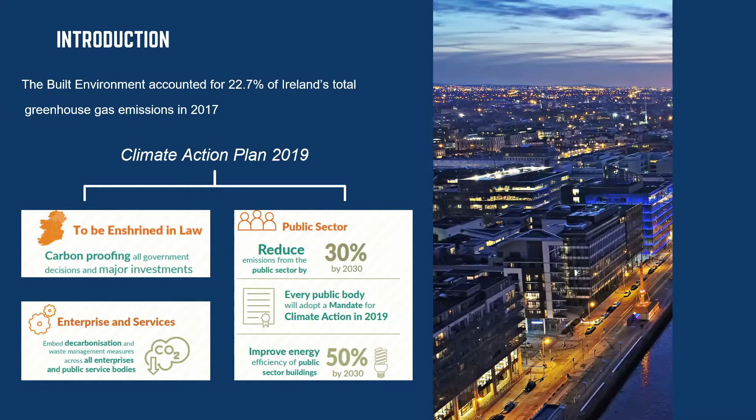It's helping since our latest election in February, which was finally resolved in about late March or April. We do have the Green Party as a coalition partner. So that is certainly helping, knocking and getting open doors within government within Ireland.

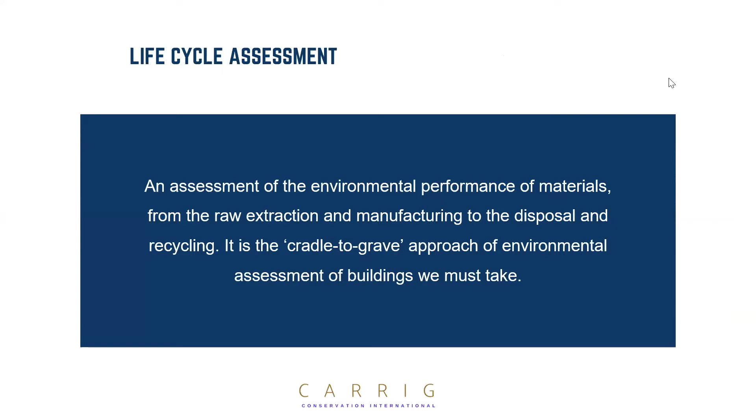So life cycle assessment really is an assessment of the environmental performance of materials from the raw extraction and manufacturing to the disposal and recycling. It is the cradle to grave approach of environmental assessment of buildings that we must take. So when you look at construction, the raw material extraction, processing, manufacture, transport, and then the construction, what we haven't included in there is waste of construction materials, which does happen on a reasonably large scale. But the transport alone, if you look at the history in recent times of our stone industry in Europe, whereas stone, granite now mostly comes from China, and there's huge carbon transport involved in that transport.

And then operational emissions, heating, cooling, ventilation, power, lighting. Maintenance, which is often ignored but not looked at seriously. And then retrofit. And I know Tom is talking after this about the suitability of materials, but if we use the wrong materials in a retrofit, we're not only doing damage to the building, but we're doing damage to the environment as well. So we really do need to look at that. And then the end of life demolition. As I pointed in the first couple of slides, transport, and then recycling and landfill.

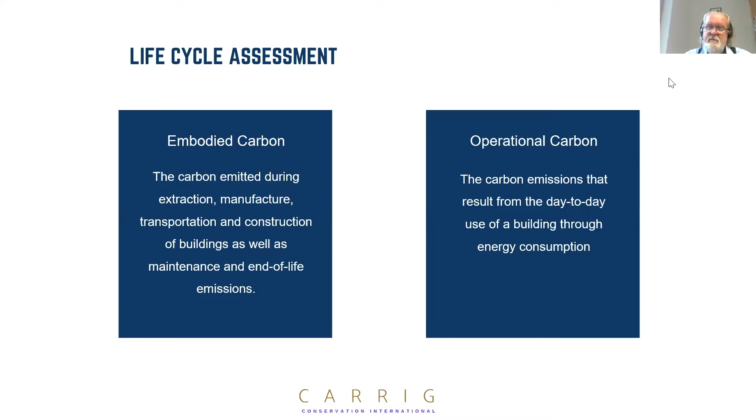And the reference study period, and this we argued and discussed and debated at length. But to be realistic, we agreed at the end that the reference study period for any of our studies would be 60 years. In the US, they've taken 75 years. But when you think 60 years is literally 1960, we have an awful lot of buildings that are a lot older than 1960. So perhaps this should be also looked at.

And then life cycle assessment on refurbishment versus new build. Time zero with refurbished cases starts at the time of retrofit, not at the time of initial construction. Only current and future carbon emissions are accounted for, not the carbon which has already been emitted. And in some cases, buildings older than 60 years perhaps should get carbon credits, for instance. New build, time zero with new build begins with the demolition of an existing building, but doesn't take in the carbon footprint of that demolition, and then includes everything after that.

EPDs, or environmental product declarations, were, I think, the first EN, well, you can see it at the bottom of the page, came in 2012, a direction from the EU with a European standard, which was actually more of a guideline than a standard, that all manufacturing companies should produce EPDs, or environmental product declarations.

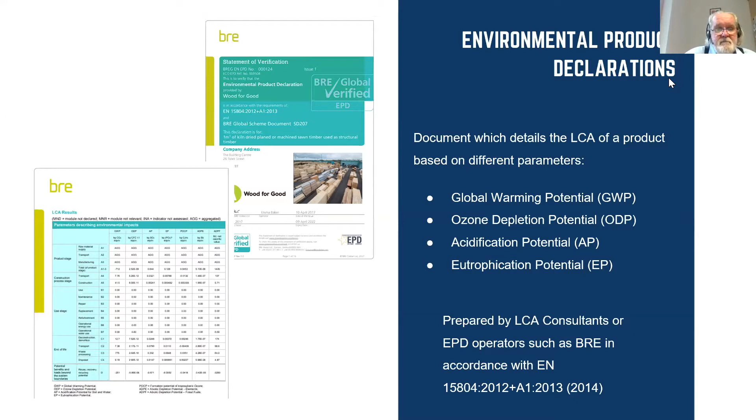And I believe France is the first European country to actually introduce legislation that from April of next year, I believe, all companies manufacturing in France will have to produce EPDs. Which will be really helpful for assessing, and for us from a professional point of view, to get the right information so that we can make the right decisions.

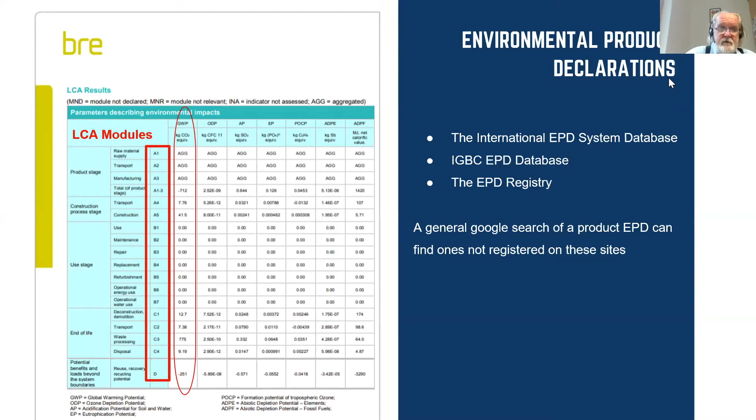The global warming potential is one of the key factors, and this is really what we should be looking at. And then the classification or the LCA modules are the important information that we need to then move forward into designing low carbon solutions for either retrofitting or indeed for new build. Pardon me.

Databases we found are lacking information, although the Inventory of Carbon and Energy is an extremely good one, and it's been kept up to date, which is fantastic, and it is a great resource. The BRE Green Guide is good, and then the WRAP Embodied Carbon database is getting there as well. The ICE, which isn't the Institute of Civil Engineers, but the Inventory of Carbon, is easily accessible, provides environmental impact in CO2 equivalents for many commonly used materials, and only 3 LCA modules, and this is where we really need to change. And these are just some examples.

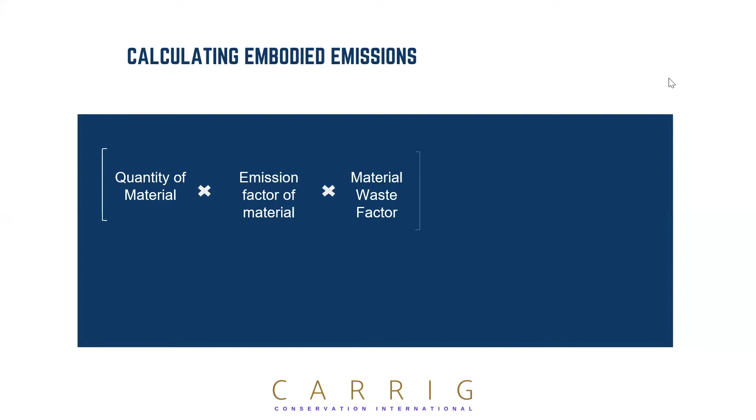They're hard to read there on the slide, but you'll be getting a copy of this for more study later, if you like. But calculating embodied emissions is a process: quantity of material, emission factor of material, material waste factor, and then number of replacements within the reference study period.

And this is where a lot of people, and I mentioned maintenance is often ignored or not taken into consideration. But if you replace, let's say, sash timber windows with UPVC windows, they're very, very efficient in the first 5 years, pretty efficient in the second 5 years. And then they start degrading and they need to be replaced usually in around 25 years. So you must also take that into consideration, and that will give you the correct embodied emission of materials. And then the sum of all materials' embodied emissions equals the building embodied emissions over the study period.

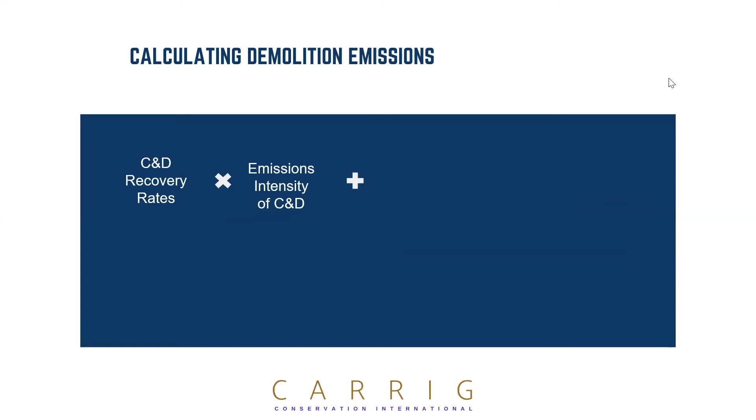Calculating demolition emissions, as I say, is difficult because there isn't a very good database for this, or it's not recorded. A lot of people just demolish and dump locally and don't record where it actually goes. Emissions intensity of construction demolition waste, landfill recovery rates, emissions intensity of landfill equals demolition emissions. And again, we need to really get some good handles on this information.

And then calculating operational emissions: CO2 equivalent emissions intensity of fuel. And we know most governments are actually driving to produce a lot of our energy by renewables. But we're still a way off on that. But even with renewables, there is an emission or a carbon cost. I mean, the big wind turbines have to be manufactured, solar panels have to be manufactured. So the end product might be low carbon, but we have to look at the whole life cycle. And then the quantity of fuel used equals operational emissions.

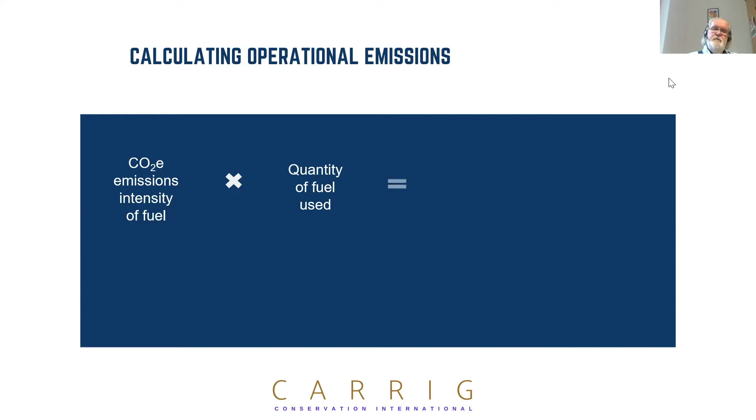Most of you know all this, but what I'm getting to is that in the studies that we have done, we have not found an LCA tool, a life cycle analysis tool, that is absolutely suited to existing traditional or heritage buildings.

Most of them are designed for new construction, and they're fine for that, but it's very, very difficult to get the right information to put into an LCA, and I'll cover that towards the back end.

So Villa Dammen is a 1936 timber frame house, typical of the Norwegian ordinary house typology. Energy retrofitted in 2014. The interventions included weatherproofing windows and doors, insulating the pipes and domestic water heater, and installation of a wood burning stove. The occupants also altered their heating management by using temperature zones during heating season and reducing the set point temperature when the house was unoccupied.

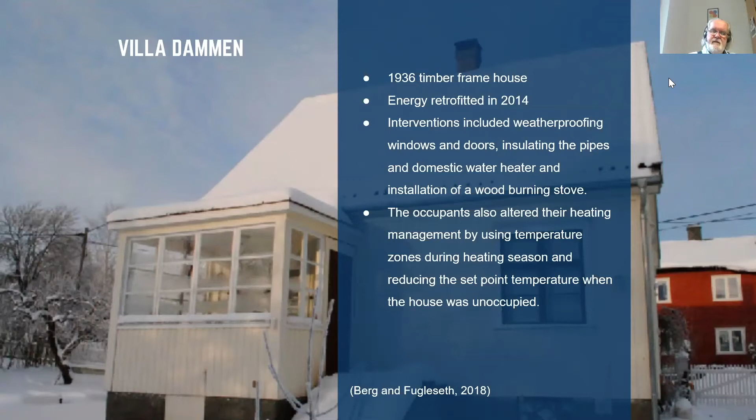And one of my colleagues said, buildings don't use energy, people do. And I think we have a lot of education to do with people on how to run our buildings, particularly our existing ones. We look at the base case, a refurbishment, then demolition and new build. And in most cases, refurbishment saves, in this case, 295 tons of CO2 compared to base case. And new build emissions are only 8% lower within 60 years compared to refurbishment.

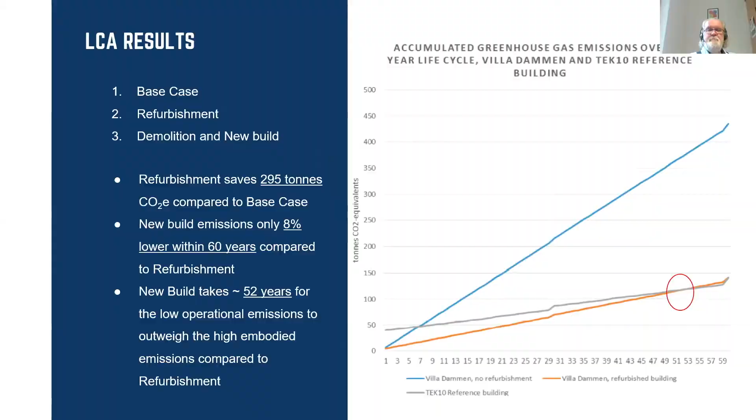New build takes 52 years for the low operational emissions to outweigh the high embodied emissions compared to refurbishment. And this is a graph that shows this. I think my photograph's in the way there, but you can see the circle there where it takes 52 years to pay back. The type and quantity of materials used, and again, Tom is going to cover this in the next one, is a really, really important part of all this. And by sourcing local materials, life cycle emissions can be reduced. In the 1800s, early 1900s, we used local materials.

Data on materials used in refurbishment of historic buildings should be strengthened. We must understand all the side effects that the wrong materials can have on building materials and building fabric. And then we need to educate city planning authorities, because in recent times we've specified products that the planners come back and say, well, we don't know this product and we don't want it used on this building. Which is pretty bizarre, but we do need to start an education process. Occupier behavior, as I said, is also very important.

In the USA, there was a case study done, which we peer reviewed and had a look at, and it was a large scale study, 6 different typologies across 4 different climates in the US. Building reuse versus new construction: renovated, best renovated, new build, best new build. They chose a period of 75 years as their study period. And then 4 indicators: climate change, human health, ecosystem quality, and resource depletion. It's referenced in the final slides, so people can download it later. So building reuse almost always yields fewer environmental impacts than new construction when comparing buildings of similar size and functionality.

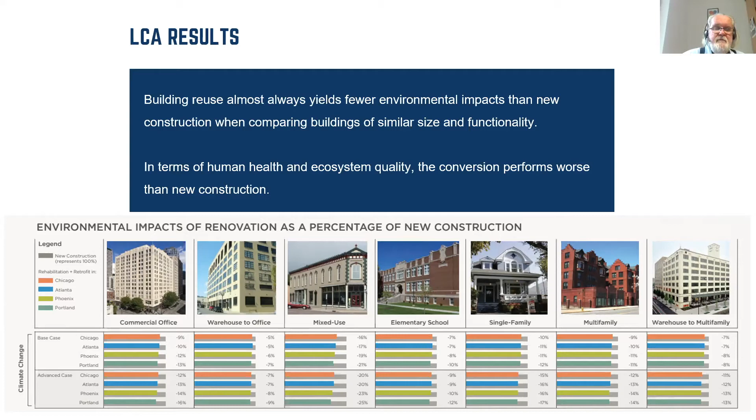And this is the US study on impacts of renovation. They took commercial office, warehouse to office, mixed use, elementary school, single family use, multifamily use, and a warehouse to multifamily use. And the findings are quite encouraging, and I encourage you to have a look at that later on. But it effectively concludes that reuse matters, improved life cycle inventory data, a better understanding of material impacts, quantity and type of materials used matter, and balance between carbon and other indicators is required.

And in most of our EPCs or BERs, building energy ratings, in other parts of Europe, we don't look at carbon at all. And in fact, in a lot of cases for traditional and heritage buildings, they have a default for solid wall construction. This has to be changed. It really does, because all the research in Scotland, in England, in Wales, here in Ireland, where we've physically measured U values of traditional or heritage buildings, they always perform much better than the default that has been set by these tick box situations. That's another whole hour's talk that you could get me going on, but let's not do it now.

Our case study in England featured five buildings in the end, but the ones that we concentrated on were a Victorian terrace refurbishment. Case study 2 was a chapel conversion from a small chapel to a private residence, and then compared to a standard new build meeting 2019 building regulations. And then the carbon emissions and costings were compared between each case study and the new build. And again, this study is on the Historic England website and can be downloaded and looked at.

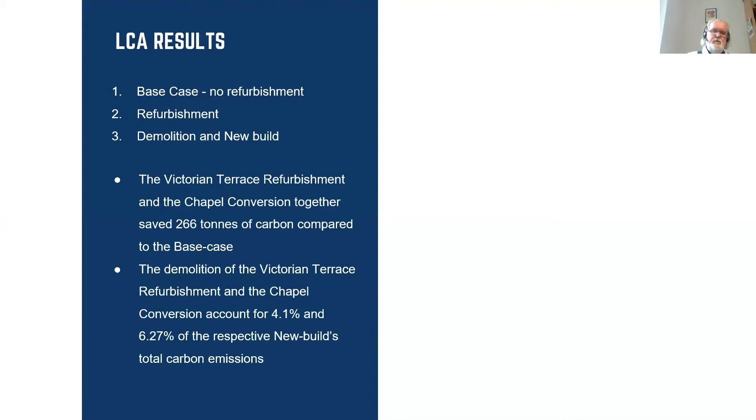But in very brief, the base case, no refurbishment, doing a refurbishment, and then doing a demolition and new build. The Victorian terrace refurbishment and the chapel conversion together saved about 260 tonnes of carbon compared to the base case. The demolition of the Victorian terrace refurbishment and chapel conversion account for 4.1% and 6.2% of the respective new builds' total carbon emissions. So it's quite stark.

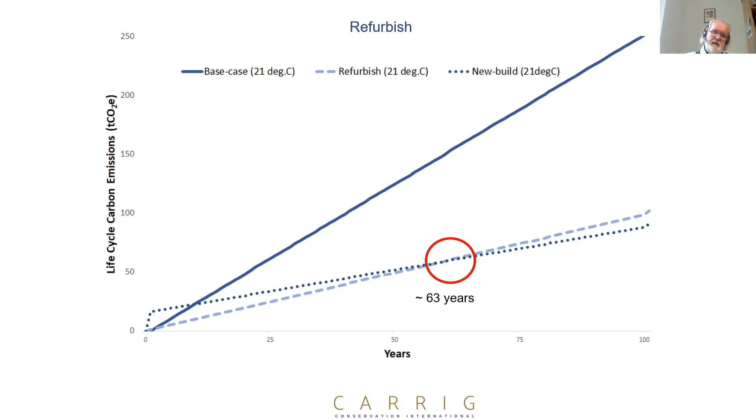So again, a chart, and you can see the dark dotted line is the new build, and it's very carbon intensive when you build it, and then it slowly works out. But again, if you take a new build against a good retrofit, it's going to take you 63 years to pay back the carbon of that new building. So we believe these are strong arguments and facts that we can now start using to gain traction, if you like, for policy change.

In the case of the conversion, again, the new build, it's about 13 years of a difference. But again, as more products are made more environmentally, that will change also. And this is perhaps using high carbon insulation, for instance, rather than a wood fiber board. But these projects were actually done before we had any influence in changing their mind. What we'd love to do as a follow-on study is to take maybe 10 buildings and actually specify what should be done, and then implement and then monitor, and to get real hard data.

So the conclusions really are: deep energy efficient refurbishment of historic buildings is necessary. When I was involved through ICOMOS in writing the EN European standard on deep retrofit of historic buildings, EN 16883, I think it is, we found that on average about 34% of our built environment is pre-1945. And that is a massive share of our built heritage.

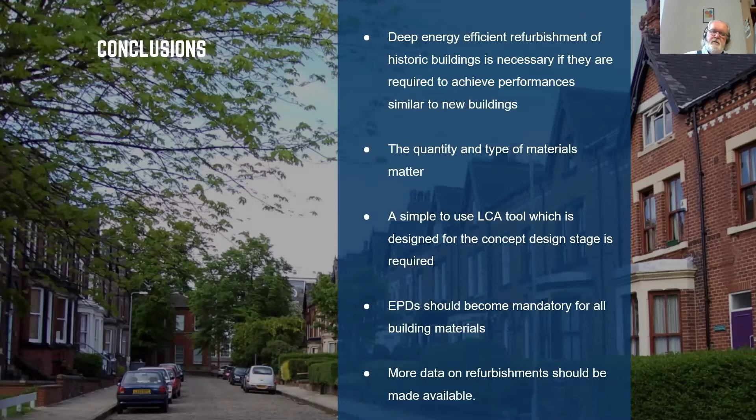So what are the next steps? As I say, an LCA tool, and we are working on that. We've got some funding from the Irish government to develop a prototype, and we have some external European investors as well. So we're hoping that we might be able to move that forward, and we'll certainly let STBA and SPAB know if it comes to fruition. But it's essential at concept design stage. It's too late coming to us or any of the professionals with a designed building, because then it's very, very difficult to make changes. So carbon really should be studied at the very first.

So if we can get all these, building material manufacturers must have EPDs. We're really lobbying the Irish government at the moment to try and make that mandatory next year. And then we've got to also think about the circular economy, and can we design for reuse? And I think we can if we put some thought into it, but we also need to perhaps start the education process early on in architectural schools and engineering schools.

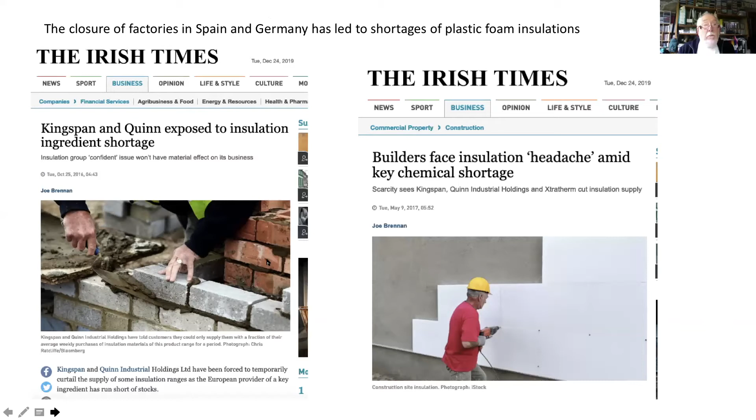And what people are using in buildings today are high embodied energy, hazardous petrochemical materials that damage health and the planet. But unfortunately, what I call the energy efficiency zealots continue to promote these materials because they say it's the only available technology. And the implication is that other alternatives are not readily available. So here we go. Here's some of the examples of what people are doing, particularly to try and retrofit buildings using these plastic foam materials.

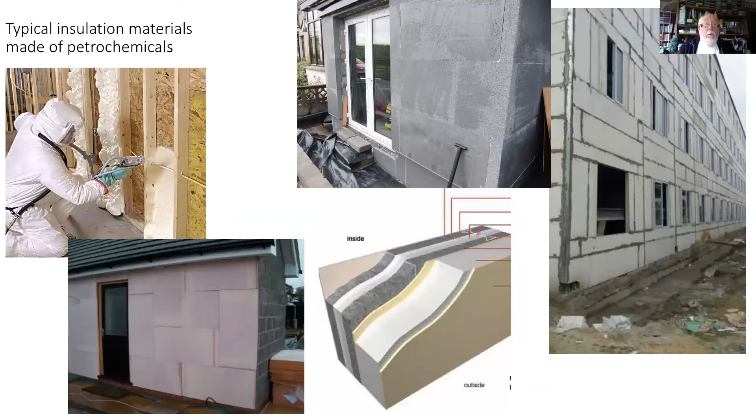So because of this clampdown on toxic pollution in Europe, particularly in the manufacture of isocyanates, the manufacture then moved to China, mainly to Asia as well, other parts of Asia, India and so on. And what that led to directly was a massive increase in CFC emissions. So when people talk about embodied energy, they are talking about CO2, but they forget about things like CFC emissions.

But the other big problem that we face, and I realize Peter's already touched on this to some extent, is the fact that we don't have good data on embodied energy. He mentioned the ICE database, which is great that it's there, but it is weak. And particularly if you try and look for data on the embodied energy of insulation materials, you'll find it very difficult to get good information. And there's a couple of pieces of work done by Callum Hill and others here, which do give you some information, but it is a problem because we don't have enough data on this.

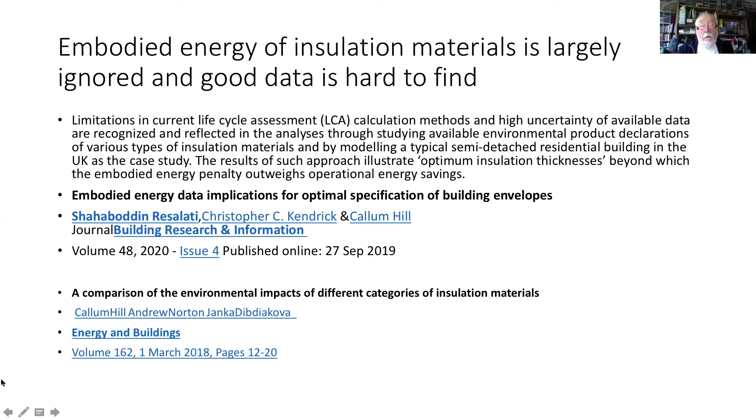And again, this is a repetition of what Peter was talking about, what Jukka Heinonen in Finland called the carbon spike, in which he showed how the emissions are due to the energy which is being consumed at the manufacturing and construction stage, not during the life of the building. That is the real problem that we've got. It's not trying to make buildings more energy efficient for the future, which I guess is something we should do, but the important thing is to reduce this carbon spike problem.

Another good person who's done a lot of work on this is Simon Sturgis, and he made a very interesting critique of the Green Construction Board route map, because it fails to take account of whole life emissions and the need to adopt a holistic approach. He gives some data on this, well worth reading.

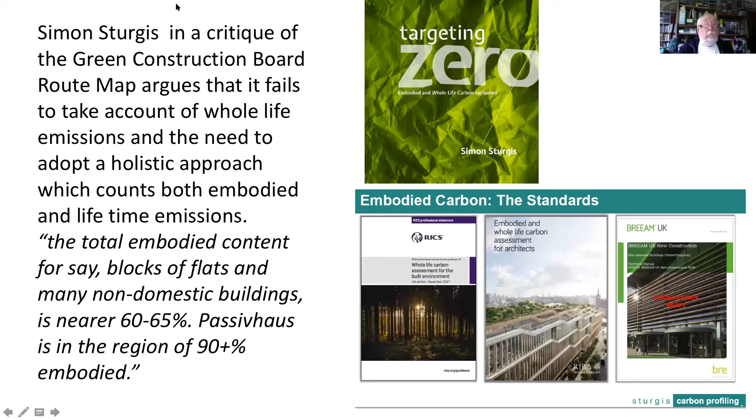And then the other thing which Peter mentioned is that if we use the wrong materials in buildings, particularly in retrofit, then we end up with these kind of problems. So we've got problems with cavity wall insulation, internal wall insulation, and external wall insulation. And one of the reasons we're having these problems is that the organizations that are calling for retrofit and zero carbon and Green New Deal and so on largely ignore the issue of insulation.

And I've been doing a study. I'm now up to about 60 reports on zero carbon and retrofit. And every single one I look at says nothing about insulation. So here we've got a range of documents that have been produced to argue for the importance of these sorts of things. And insulation is never mentioned other than very occasionally, and then usually in the most general of ways. So we need to insulate buildings, that's what they say, but none of them go into any detail. That's what's shocking about it.

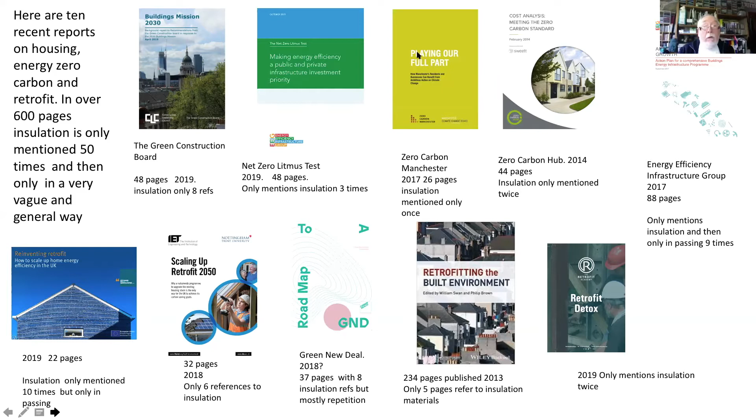Here's a whole stack more of them. It really is quite baffling that people can write reports about how we need to renovate and retrofit buildings and not even mention insulation. That has to say something about the fact that people don't understand the issues. Perhaps the worst of all is the UK GBC document, Net Zero Carbon Buildings, which doesn't mention insulation once.

Interestingly, the House of Commons energy efficiency building towards net zero and the much maligned Each Home Counts report do actually go into insulation in quite a lot of detail. So that's good. It's good that somebody's actually addressed these issues.

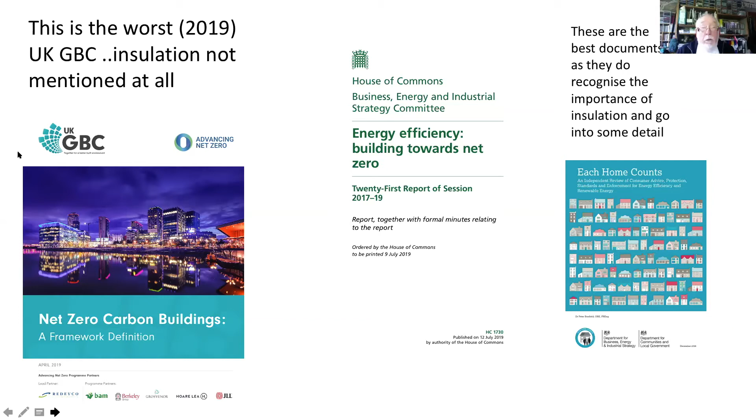But the problem we're facing in the UK, I'm not so sure about Ireland, is what's becoming known as the retrofit disaster problem. And here's a couple of interesting quotations. There's someone working at Bridgend Council delivering Arbed schemes. He says, we were merrily cladding buildings, filling cavities full of insulation. 5 years later, we've got companies setting up now to take the cladding off, take the insulation out, because we realized that actually either wasn't the right thing to do, or the skill set that delivered it wasn't properly skilled or done in a rush.

And this is becoming a massive problem, which is beginning to get into the media. There was a report about this in the Sunday Times quite recently, though it focused really on cavity wall insulation problems. And obviously there's been a response to this. We're now expected to comply with PAS 2035. I'm not sure that PAS 2035 will solve the problem, because it doesn't deal with the issue of materials, and it certainly doesn't deal with the issue of embodied energy.

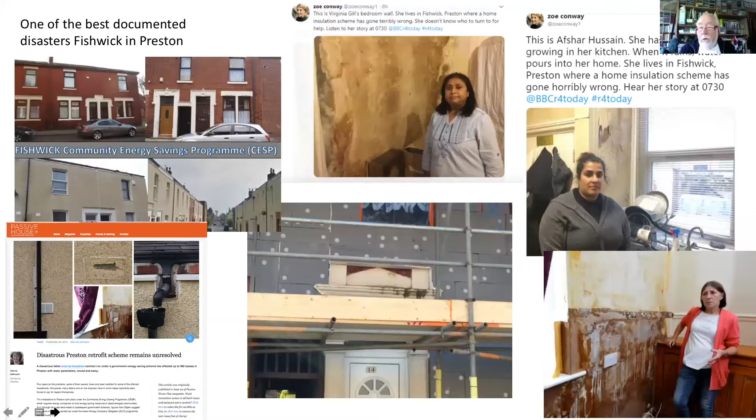So here's just a few other horror pictures from the retrofit disaster problem. I won't spend a lot of time on this because some of you will probably be familiar with this. Perhaps people are particularly familiar with Fishwick in Preston, and the NEA did a webinar about this the other day, because they're trying to deal with some of the problems here. But I've got a lot more stuff on this if people are interested in it and not familiar with it.

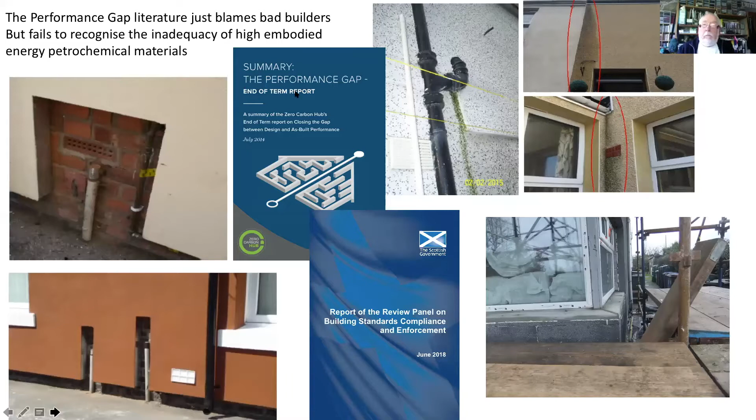The other problem with the wrong kind of materials is using flammable materials. So one of the problems with petrochemical insulations is that most of them burn. Some of them burn more easily than others. And of course, people are familiar with the horrific story of Grenfell, but what tends to get ignored is the serious problems in lower-rise buildings, in which there are literally dozens and dozens of fires, all of which, in my view, are a result of using flammable petrochemical foam insulation materials in buildings. There's also a problem with poor installation of fire stopping and so on.

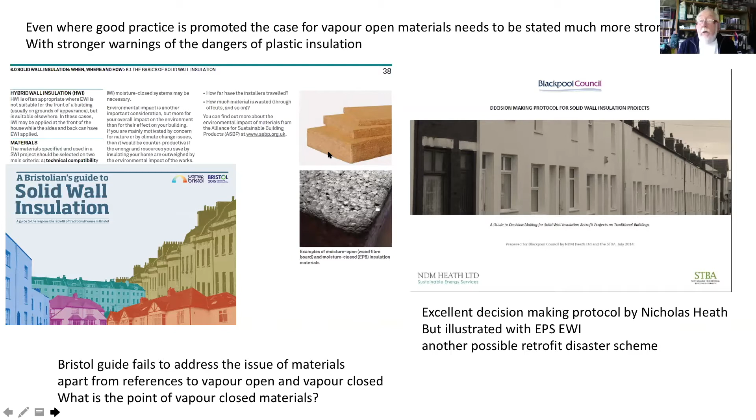So I believe it's important to be much more explicit about the need to use the right kinds of materials, and we have to be using vapor open materials, and these materials by and large have much lower embodied energy than the petrochemical materials that I've been criticizing.

So here we've got some examples of wood fiber insulation, which is being increasingly used, though one of the problems with wood fiber insulation is it's being imported from Europe. It's not manufactured here in the UK. In fact, hundreds of thousands of tons of wood waste go to landfill in the UK every year, which could easily be used to make wood fiber insulation, but that doesn't happen.

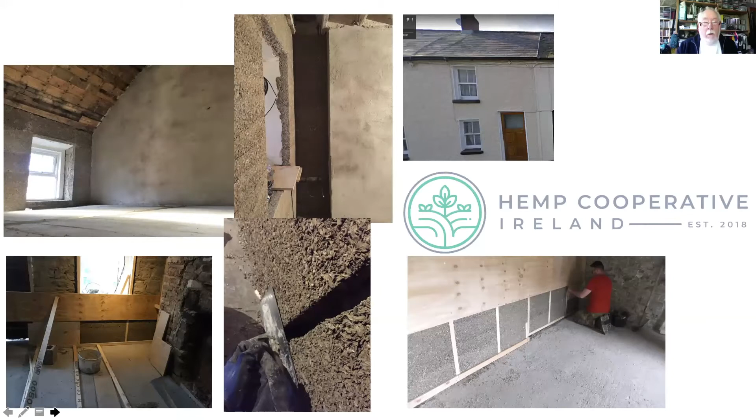The supply of hemp is not really a problem. People often say that this is a difficulty with using natural materials, but we've got some great suppliers, particularly in Yorkshire. We've got Harrison Spinks, who make wonderful mattresses using hemp and natural wool, but they also can process a great deal of hemp. And in fact, there's plenty of hemp to go around with the companies available, though obviously production could be increased as more and more people are growing hemp in England in particular.

We use at the moment lime binder, and there are a lot of lime binders being imported from France and elsewhere, but we have homemade lime binders, one that is made for us by Kilwaughter in Northern Ireland, and there's a new lime binder coming on stream soon for hempcrete from Lime Green in Shropshire. So the supply chain is kind of there, but we need to obviously increase the amount of production.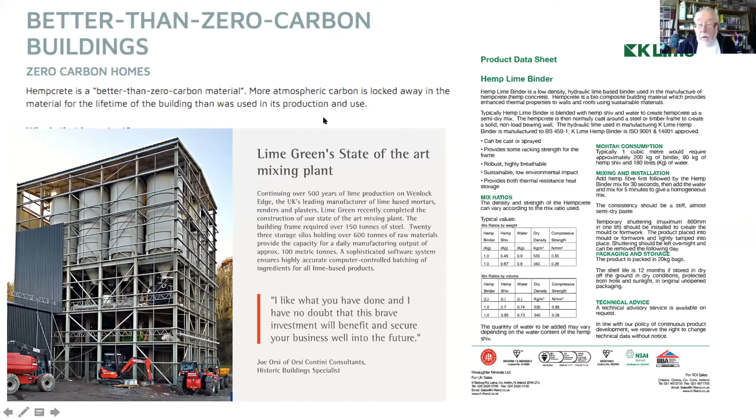So just to finish off, I want to show a couple of examples of work that's been done that's looked into this. This is a really excellent study that was done by Roseanne Walker at Trinity in Dublin about a building in the Royal Hospital in Kilmainham, where they actually experimented with a number of different kinds of materials. And there's a lot more information on this than I can show here, but you'd need to ask Roseanne for it if you want more detail. But she was able to compare the use of cork lime, hemp lime, and they even put PIR boards on the wall to see how they performed.

And there's a fair amount of data on this, but what it shows is that the breathable cork lime and hemp lime materials performed far better than the other materials. The PIR insulation boards, which are being used a lot as internal wall insulation in the UK, were completely off the scale in terms of their inability to deal with water and moisture, and even in terms of thermal performance. And we need more of these kinds of studies. We need the data that shows how these materials perform.

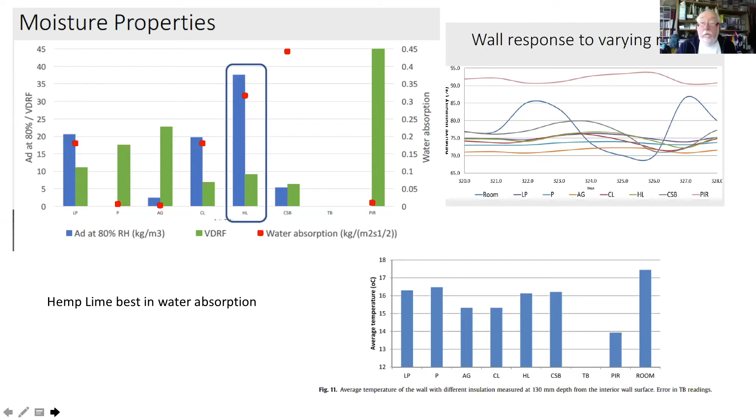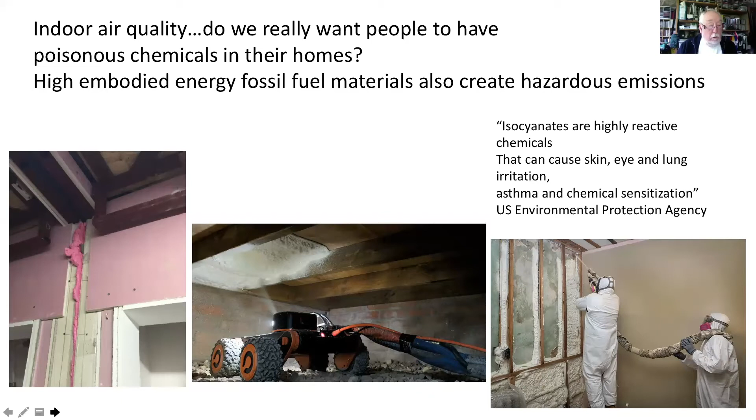The other interesting piece of work that's been done by Richard Sharpe and others at Exeter showed that people's health got worse as a result of retrofit schemes, not better, which is often claimed. So there's some important work there.

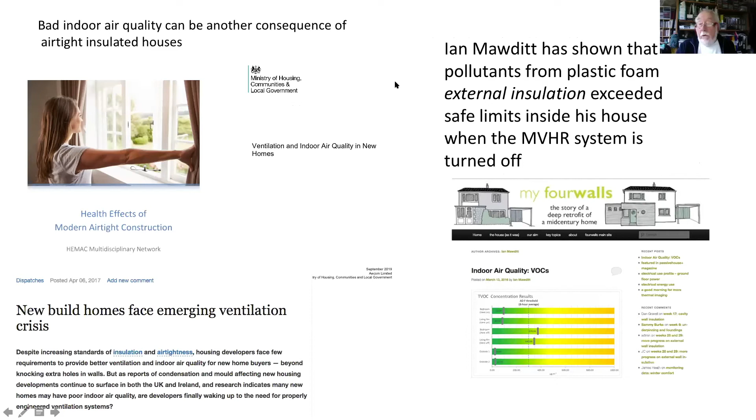I got the slides slightly out of order here. There's quite some good work being done by a thing called the HEMAC project, Health Effects of Modern Airtight Construction, if people aren't familiar with that. And also some very interesting work done by Ian Mawditt. So there's a lot of information starting to come out.

So looking at the time, I think I'm just about on time. The argument really is that if we can use natural, low embodied energy, non-toxic, non-flammable, breathable materials, then we're going a long way to solving a multitude of problems and reducing embodied energy. So I hope that's of interest, and happy to take any questions.

Thank you, Tom. That was absolutely superb. I've had rather more contact, even perhaps than I wanted, with BEIS recently, and with a number of organisations who are entirely focused on the metric of carbon emissions in use. It was just so encouraging to know that there is somebody around who's really got their head into this and has assembled so much evidence, Tom. I think that if we're all able to download your presentation and look at it in more detail, we can all start to use that evidence.

And in fact, John Preston asks whether you've presented this evidence to the Environmental Audit Committee and or the Public Accounts Committee. I did actually make a submission to the Environmental Audit Committee, which did a review of some of these issues recently, and I did submit evidence, so if it's still there you can find it, but they tended to become rather obsessed with flame retardants, which is an extremely important issue, and a major contributor to bad indoor air quality, and flame retardants are carcinogenic and endocrine disrupting. So it was important that they looked at that.

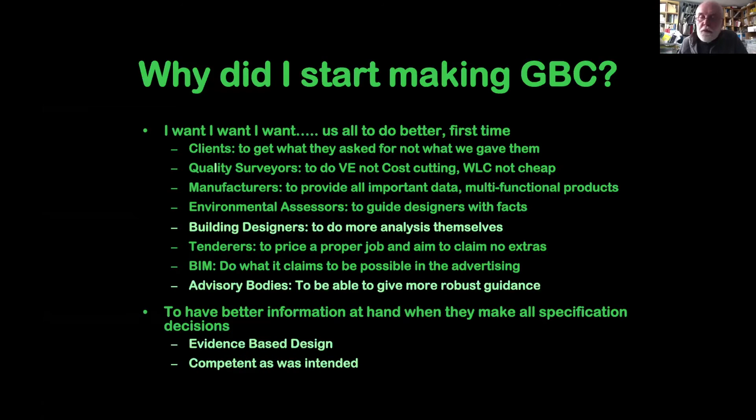Tenderers, I want them to have the chance to do a proper job, price a proper job, and aim for no claims for extras. That isn't going to happen because of the way industry is working at the moment. And I want BIM to do all the things it claims to be able to do in all of the advertising. And I want advisory bodies to be able to give more robust guidance data. So I want more evidence-based design. I want competent as was intended. So manufacturers are kind of developing new products to do certain things, and then we use them in the wrong places. So I need that kind of squashed as quickly as possible.

I'm just going to try and move this. Can't see the screen myself.

So data sets, equations, calculators, and apps. Again, I can't move forwards. Right, so data's okay as long as you've got lots of it. It's not much good on its own. You need a lot of it. It needs to be consistent, all in one place, all in one spreadsheet. Open databases if you can get hold of them, and data sets do not tell the whole story. Behind the LCAs, there are reports which identify all sorts of other issues. I like the idea of donating data, which I noticed on Peter's slides earlier.

Equations are essential. Equations can interrogate the data, and then calculators save time, consistently apply joined up equations and data sets. We need them to be ready-made, waiting to be used to speed up the process. We can have built templates where a lot of information has already been developed for you, to be able to accommodate choices and changes and bring instantaneous results. When we do a calculation, if we change one material or a thickness, we need to see the results all the way through all the calculations.

We need to interrogate many issues at the same time, allow comparisons of different scenarios, to do proper value engineering in its original meaning, not just cost cutting as is practiced in the UK. And it could become an educational guide and a problem avoider. We could enable and empower individuals if we've got some really good calculators. And of course, a CAD BIM app calculator, if we can have it, saves time populating the input cells in the calculator, and allows a two-way flow of information from the calculator to built models and template wall elements, etc.

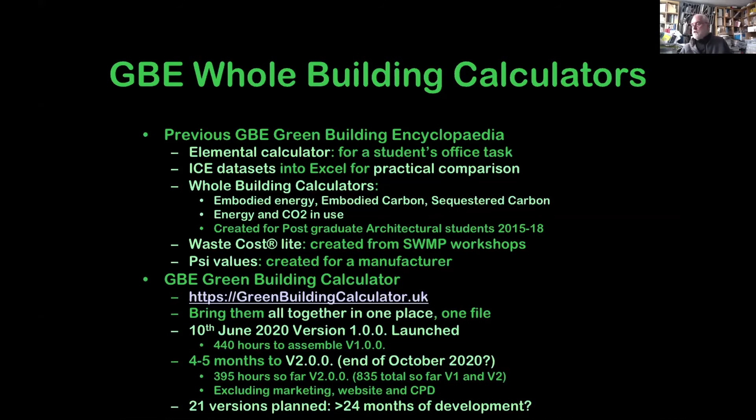So version 1 was published June 2020. And that took about 440 hours. I've done another 395 hours developing version 2, and I'm hoping by the end of October I'll be able to launch version 2. I've got 21 versions planned, 24 months possible development time. And this all comes from a desire to drive environmental improvement. So bio-based construction through the CAPEM project that we worked on, a European funded project, which was all about LCA.

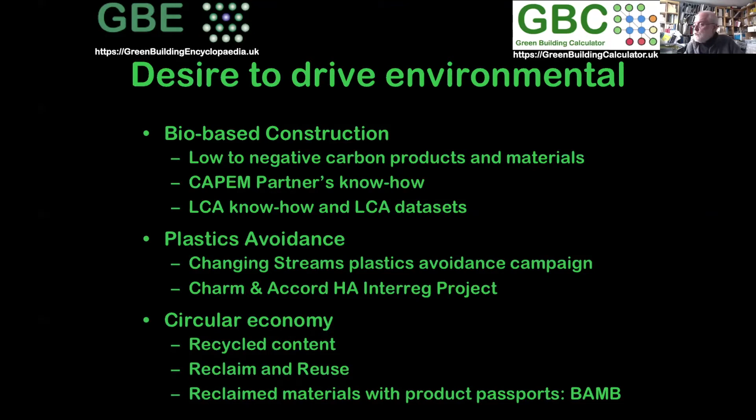Plastic avoidance, which, you know, both of these items have been mentioned by Tom and Peter already. CHARM is a European funded project, and Changing Streams is a plastic avoidance campaign where they're doing more research and gathering information together. And circular economy about recycled content, reclaim and reuse, reclaim materials with product passports, the BAMB project, which is a Horizon 2020.

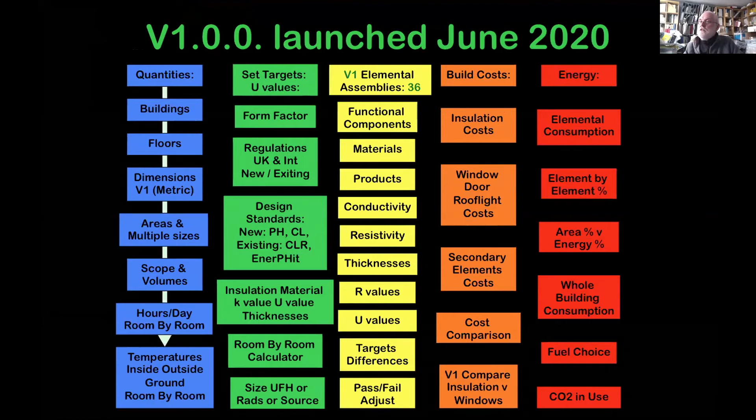So a kind of executive summary of the calculator. There's a lot of parts to this. I'm not going to dwell on this at this stage because I want to show you the calculator, but it just gives you an idea of what we're trying to engage with by bringing a lot of different calculators into one place. So all of these 5 parts are already stitched together very robustly and interact with each other so that every time you add information in the early stages of the calculator, it has an impact further on in the calculator somewhere else. And so once you've got every bit of data in, if you then change something, instantaneously, the calculations run all the way through the 5 modules to give you up-to-date data in all areas.

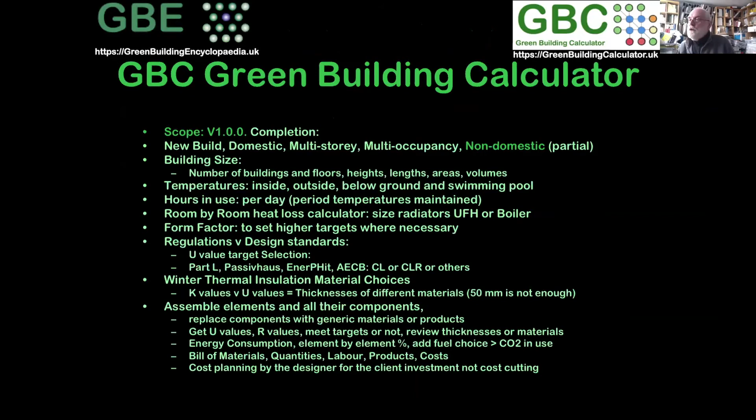So I'm developing it at the moment, and the progress is in light green; the dark green, the non-domestic part, is only partially developed. It was originally developed for new build for the university students. It's gradually kind of evolving. So version 2, which has got a high degree of retrofit ambition built into it, is having some parts of version 1 updated. Again, I won't dwell on these too much at this stage.

And some additional modules are being added into it so that we can look at terrace, community scale projects, interior furniture, MEP services, landscape, so that we can do a whole bill of quantities for a building that's being refurbished or a new build. Some additional items for overheating, condensation checks, because if we don't do those as well at this early stage, we might as well forget it. We're going to get buildings wrong. And of course, the condensation check using BS 5250 is a very, very basic one. But all I'm trying to do here is identify what we shouldn't do. Rather than tell you this is a good piece of construction, we can identify the ones which are wrong.

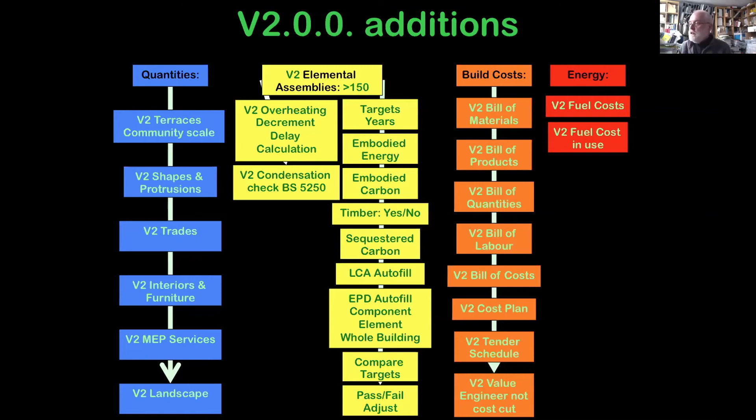Then we've got the embodied energy, embodied carbon, and life cycle assessment calculations, including sequestered carbon if you're using timber. The life cycle assessment part, the EPD, all built in, already started, and I'll show you a bit more of that later. And a bill of materials, bill of products, bill of quantities, bill of labour, bill of costs, and then you can start doing cost planning. You can have a tender schedule, and you could probably do some proper value engineering, not just cost cutting. And then we've got some additional information on fuel cost and fuel cost in use. So that is kind of developing.

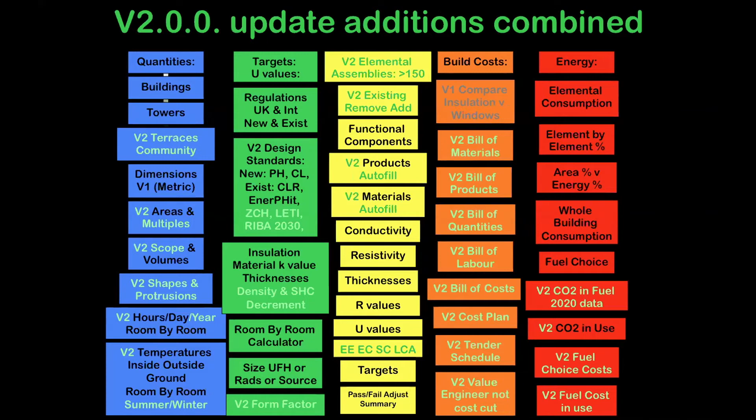And that's what the whole thing looks like as it is today. It's not complete, and it won't be until the end of the month. And there may be one or two things which don't quite make it to version 2 and might get dropped into version 3. And the current development, the pale green, is already well underway. The dark green is possibly not going to make it. Decrement delay and condensation check might end up in version 3. LCA calculator and material miles, I'd like to get that in. I've got the LCA bit in, the material miles bit might be a bit more complicated, so it might end up in version 3. MEP services, well underway.

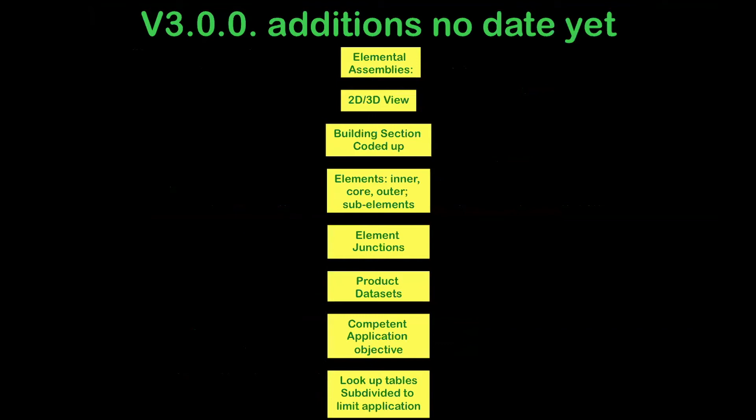So version 3, planning to put in elemental assemblies. I've got 892 elemental assemblies, but in order to do that, I need to subdivide the building up into component parts to make sure that we use materials in the right places, because there are big problems. So this is how I'm breaking up building elements into sub-elements and to component parts.

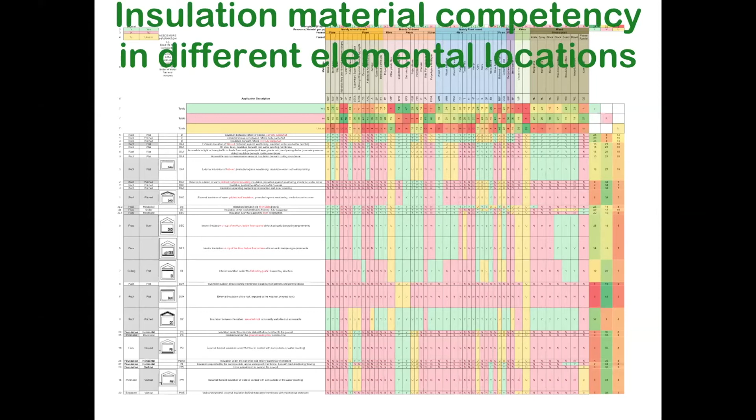And I'm also very well aware of the problem that Tom brought up. In fact, Tom and Peter both brought it up, that the use of thermal insulation materials in the wrong places is fundamentally a problem that we really have to get to understand. I did this part of the product environmental footprinting (PEF) European community project to start to identify those materials that should and shouldn't be used in different places.

So once I've got that piece sorted out, I then need to drive the Excel spreadsheet to stop you putting the wrong materials in the wrong places. So I'm also doing elemental assemblies, 892 ready-made. Users' bespoke assemblies will invite users to donate their information. Manufacturers' competent system assemblies, when they are at least Agrément certified, if not European technical approval and other things.

And we want all of this stuff to be in lookup tables so you can pick and choose materials, but you can only pick those that are competent in the application. And at the bottom of the process, there'll be a specification generator, because I've got the stuff in spreadsheets. So there's a big hierarchy of 892 elemental assemblies in hierarchical order. Every one of those elemental assemblies has got a spreadsheet listing like this with the full specification, generic prescriptive specs and performance specs to be developed.

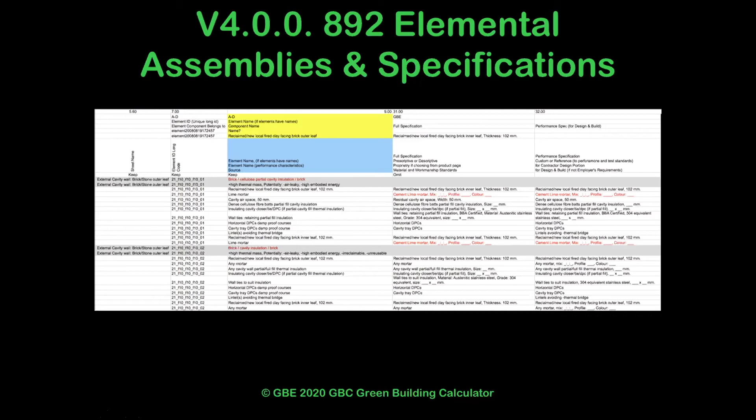The elemental assembly includes all of the component parts, and there's also a critique in here which tells you whether this is high thermal, potentially air leaky, high embodied energy, things like that, just brought to your attention so you can make some decisions about whether you want to use this assembly or whether you want to go another route. So future development, I'm just going to pop in a few extra things that we've been thinking about.

Service design module, lighting design module, biodiversity inclusion calculator or something like that. Local climate appropriate, I think this is probably quite important and needs to come earlier. It's about using the right building technologies in the right climates. You know, Europe, Middle Europe and England, UK, Wales, Ireland have got some seriously different climates, and they do need to be addressed in a more robust way.

There's a guy who's really keen to start talking vernacular. I'm interested in local and a green building price book, which we talked about 20 years ago, but never happened. I've been talking to the original guy that proposed it and thinking about how we can make it happen again. And then we can have some proper value engineering stuff going on. So then bespoke development opportunities.

Now this is an idea that's been prompted about actually understanding the real impact of upgrade measures. It might be changing windows to double glazed or triple glazed windows, or it might be upgrading the glazing. So we need to have lots of embodied and energy performance of glass spacers, gases, low-E and SC coatings, frame profile, frame materials, weight, trickle vents, all those things. So we need the embodied energy, the embodied carbon, the sequestered carbon.

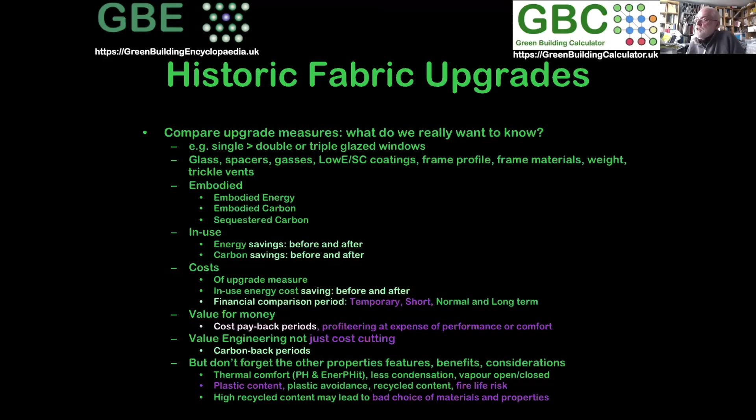High recycled content may lead to bad choices. WRAP did a great job of encouraging us to use higher recycled content, and we ended up changing materials and properties and ending up with materials, buildings that probably didn't work very well.

So I did a quick analysis. This is really rough and ready, gut instinct stuff about using single, upgrading to double, using secondary glazing. I'm just going to try and turn this thing off because it's getting in my way. Okay, secondary glazing, double glazing, replacing with double glaze, replacing with triple glaze.

So all of the kind of environmental impacts, we already do these in the calculator. We probably just need to add in a little module that does carbon saved in use. We could add in payback period. We can add in carbon in the waste, and we can do carbon payback period. So all of that stuff can be done. So we just need to convert all of these pluses and minuses into real

numbers. We've got evidence-based design and evidence-based specification, and so we can have better, more robust information available to consumers. And this is the sort of thing that we might have hidden behind some advice. So we've got the energy performance, the U values, the energy saving, the cost savings, the carbon savings, embodied energy, embodied carbon, and sequestered carbon, all that data behind the advice that we can give.

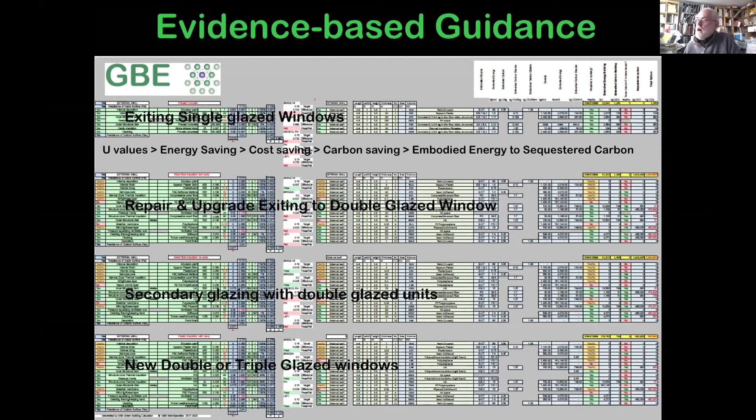It doesn't take much. We've just added in the 6th module, which is the waste, which I'm planning to do in version 11, but I might need to pull it forwards. And then add in some additional items, which we've talked about already, to kind of address this stuff.

And a lot of information based on the waste cost light calculator, which I produced over a weekend and told BRE, go ahead and do this, gave it to them for free. It took them 3 years, but they got there in the end and they produced an equivalent tool, by which time the QS has left the building.

So 21 versions, 24 months of development. Early versions generate early sales, which mean a little bit of time and money, so I can keep on developing it. Users to guide, so we'll set up a kind of steering group to make sure that we're prioritizing all the stuff that needs to be done soonest. Early consultancy work on house types, competition entries, compare element upgrade measures, all of those things can be done to help parts of it to be developed soonest.

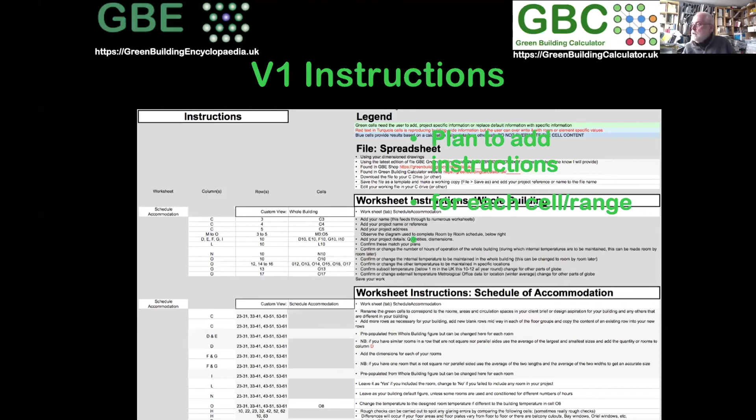So now I'm going to look at some screenshots. There's a whole bundle of instructions. I'm going to try and turn them all into pop-up menus on all of the cells where the activity needs to be carried out. There's color coding of the cells so that you know what to do. If it's green, I'm looking for the users to put information in.

If it's pale green, pale blue, then the calculation has been done for you, but you can overwrite it if you wish to. If it's dark blue, then it's permanent, the calculation's been done for you. And occasionally there's some pink cells, which are drop-down menus. And in the BIM world, a lot of this information will either come from bills of materials or from the model itself. So that's where we'll be heading in due course.

And there's a lot of spreadsheets, there's a lot of worksheets, and you just got to go in and populate some of the cells. Sometimes there's some drop-down menus. So the green ones, so we've added the terraces for the retrofit. We can add the numbers of terraces. You can choose whether the building is in the middle of the terrace, at the end of the terrace, and then it will do some more calculations for you.

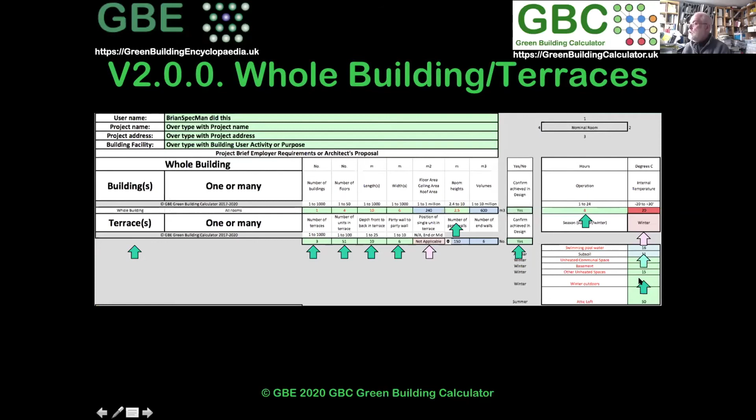You can say how many hours the building's in occupation, what temperatures you're aiming for, and you can tweak a few other bits of information in the tables. A schedule of accommodation if you need to go closer than building level, so you can look at every room, every floor, and the size of the rooms, the temperatures of the rooms, the heights of the ceilings, all of those things, and then put a yes in the right cell, and off you go. The calculation starts generating the information you need to know.

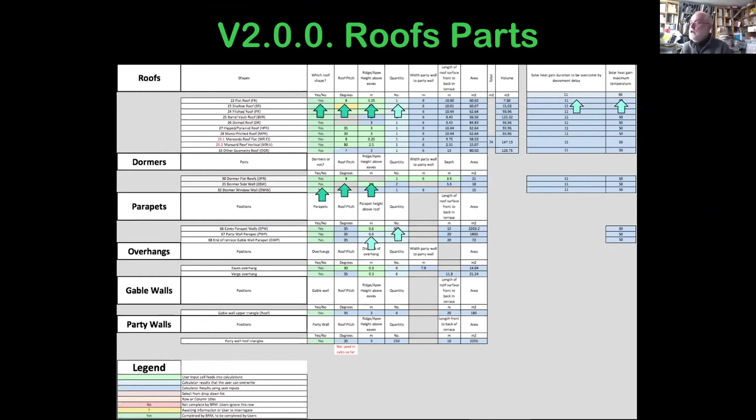And for retrofit, we've got roofs, dormers, parapets, overhangs, gable walls. So we've got some extra calculations that go in both for U values, but also for embodied energy, embodied carbon, LCA, etc. And again, you interact with it, put some information into the right cells.

Other geometry roofs, because inevitably somebody's going to do something fanciful. So we've got that calculator. It's not been developed. I've set that aside for now so that the Zaha Hadids can kind of do really complex stuff later on. I'm not dealing with that straight off.

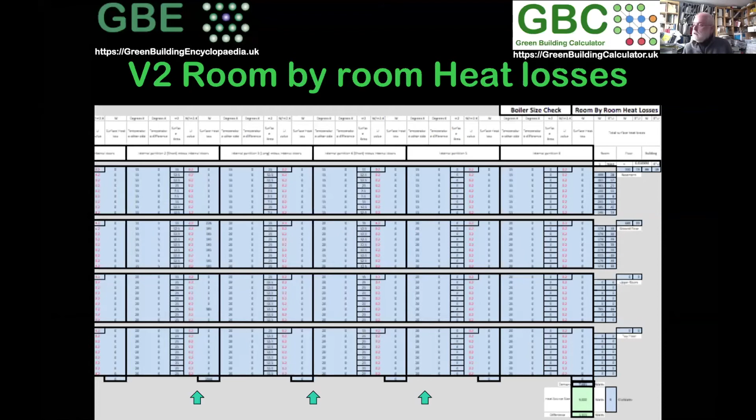Room by room heat loss calculators, so that you can engage with how much energy do I need to heat this building, these rooms, what radiator sizes, what underfloor heating components do I need. You can put in a boiler size, and then you can work out whether you need more insulation in any of the walls.

Then a form factor calculation, so that we can start to engage with the shape of the roof, whether or not the building has rear extensions, whether there are weather porches, conservatories, sun space, bay windows, oriel windows, dormer roofs, all the sorts of things that you might start adding to existing terraces in order to deal with the old building stock. Just going to go back one here.

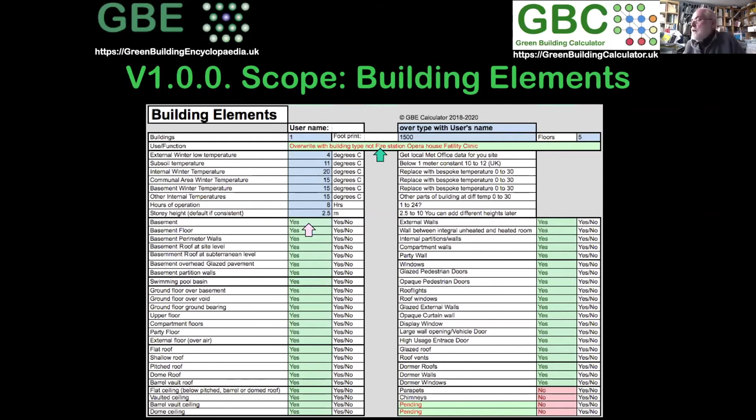Here we actually go into the scope of work of the building. You're deciding which bits of the building do you have? Have you got basements? Do you have basement floors, walls? Do you have a swimming pool? Do you have ground floor over basement, ground floor over voids, etc.? This was the early version. The later version has a significantly larger number of components.

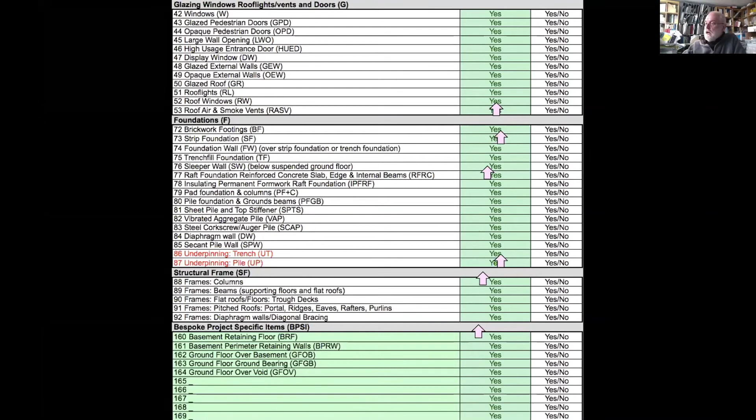And then the bespoke set, the 892 ready-made assemblies, they'll be available to engage through this in a later version, in version 3 and 4. Non-U value envelope components, so basement external wall, so there's building fabric involved in those, basement internal walls, partitions, shafts, compartmentation. Then we've got a whole chunk on eaves, parapet, party wall. So going into a bit more detail, and cherry picking all of the parts of buildings.

And I've done a few project specs recently where I've had to add in a few additional elements. So as I keep thinking of them, I place them in the calculator and come back and add them in more detail further on. And then if you're interested, external works, and if you want a bill of quantities for the whole building, then you're going to have your external works, your furniture, your MEP services. I've subdivided the MEP services in domestic and non-domestic so that we can engage with domestic more rapidly.

And these could be just an item from a supplier or an installer, or it could be broken down into much more detail, which the calculator will do in due course. And then for every one of those elements that I've described so far, the calculator goes into more detail and starts working out areas and volumes. Occasionally there's a few more bits of information that are still required.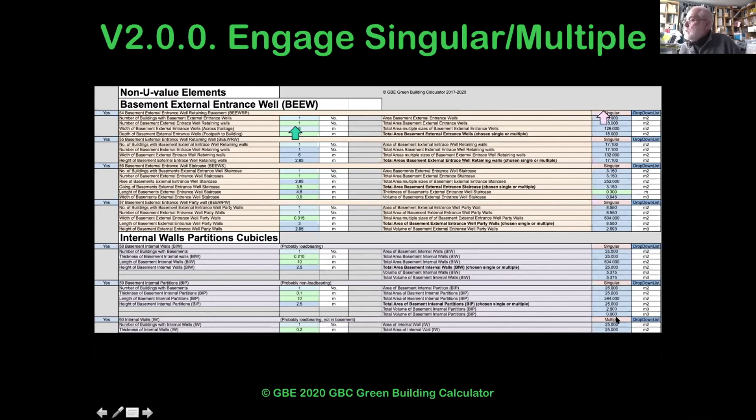And if we have things like windows which come in a multitude of sizes, the calculator can deal with those. Over here, we've got the opportunity to either use the information from this sheet, or you can choose by dropping the menu and picking out multiple, as has been done here. It will then pick up the calculations from the previous table. And then choosing your U values, whether you're using regulations or whether you're using other design standards.

So AECB carbon, Passive House Institute, Minergie, Zero Carbon Hub, LETI, RIBA Carbon Challenge, National Building, Green Building Councils, and other stuff, Transport for London, BREEAM, and Code for Sustainable Homes, which are kind of relegated to that over there because I'm not that impressed. Although the U values for BREEAM seem to be quite good here, which is good. All color-coded, so you can see which regulations do well, which ones don't do very well.

And also down here, we've got other things like glazing percentages, orientation, form factor. And so all of that information is there. So you can choose a standard and you can choose which letter of the columns you put in here. AB, for example, comes out at AECB, etc. And moving on, insulation, all the different insulation materials with their K values and all of the U values on the right-hand side. So loads of different materials, different formats of thermal insulation.

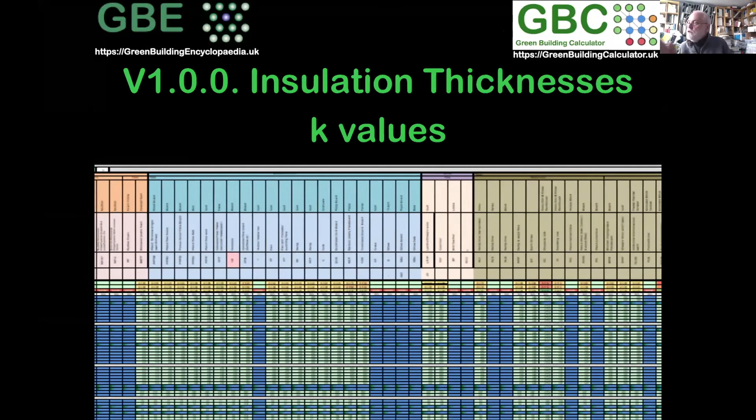And so we go into K values, worst, best, and average. The average is used in the calculation. The U values that you've chosen from the AB letter from the column in the previous sheet then apply themselves in here. It then recalculates all of your thicknesses of the thermal insulation to suit the K values of those materials. Some materials I've advised not to use, like asbestos cement and ceramic fibers, and some I still don't have the data for, but no doubt I'll get that as we progress. And it kind of goes all the way through.

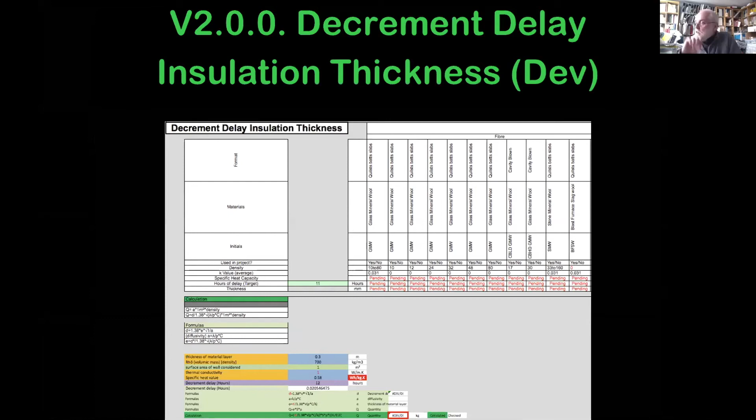I've also got a decrement delay calculation for summer overheating. That hasn't been developed yet, but it's sitting there waiting to be done. And so then we've got U value calculations for 12 elements of the building. Next, that goes up to 24 of 39 in total. That will all be in version 2. So it's a case of putting in here which element of the building, which component of the element are you including? So we've got decoration.

My apologies. I couldn't hear what you said. Go away. Just turning all the phones off.

Okay, so here we have a whole bundle of component parts where we choose the material. At the moment, we have to populate these cells manually, but in version 2, I hope that this will be populated dynamically. You choose one material here, and all these cells will populate themselves automatically. In due course, the product information will allow me to choose the product name here, and it will populate all of the cells across. Having chosen your thicknesses in here, it will tell you whether you've passed your U value target or not, and you can then tweak your thicknesses until you've got all of that sorted out.

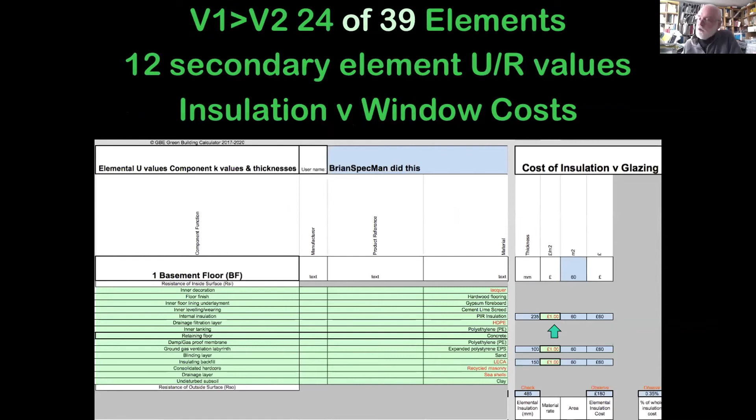We've got a little calculation going on here to do with thermal bridging, and that's how much of the space is occupied by framing and how much is occupied by insulation or air or whatever. So that allows you to do calculations for thermal bridging in timber wall construction, for example. Moving on, there still is a little calculator where we could just look at insulation costs and compare insulation and glazing so that you can start to do some value engineering with your client, saying spend a bit more money on thermal insulation and a lot less money on glazing to get your U values improved. I've added in the condensation check, which is not complete, it's in development.

I've added in the overheating decrement delay calculation, but that's not complete. I've added in the bill of materials. Now, one of the important things about the bill of materials is we need to know about the refurb action. So we've got the component part, what it's made of, and the calculations here where you add in the prices, but you actually need to give guidance to the contractor. Are you using the existing? Are you preparing? Are you overcoating? Are you using the existing unchanged? Are you removing, reapplying? Are you removing, reworking and reapplying? So these are from a drop-down menu, which has already been developed. It will no doubt keep on developing.

Then the contractor could price their labor rates and their material rates, and you've got a bill of quantities so that you can then start to look at things. And comparing a full bill of materials, quantities and cost with the RICS's kind of standard arrangement is detailed elemental cost analysis, where 5 or 6 of these elements would be lumped together in one single calculation.

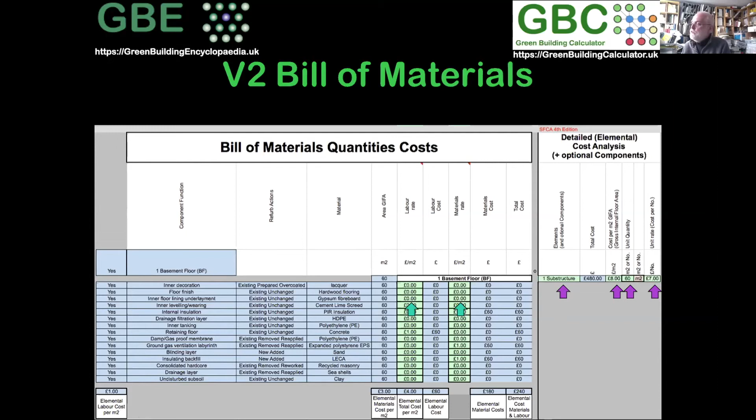There's no way that they can be getting this accurate enough, and there's no way that we can be relying on it. And the way the industry's gone, where people are beginning to question whether SPONS is good enough and whether the way we tender for stuff is good enough, we've really got to move on and do better.

So the embodied energy, embodied carbon, sequestered carbon calculation is already built in. It's just a case of you choose the material from a drop-down list, and then all of these cells populate and calculate. And then up here, we get the whole building calculation all in one go. So you've got embodied energy, embodied carbon, sequestered carbon, is it made of timber, and total carbon, all done for you.

So then we go on to the life cycle assessment part, and using some of the information that was presented earlier from Callum Hill and Andrew Norton, and using the BS EN 15804 2012, I've added in the priority areas and highlighted those things, but the calculator will allow us to populate all of the cells. So this is based on that one element that we've been looking at. And we need to prioritize.

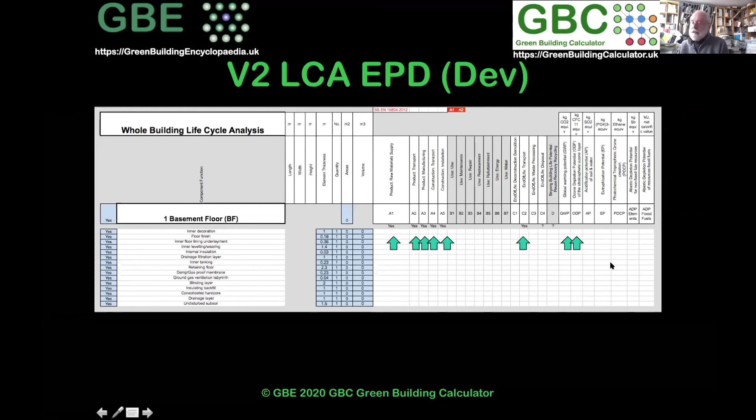The latest versions of EN 15804 are asking for significantly larger amounts of information, subdivision of the LCA EPD data, to the point where an awful lot of it's becoming less and less relevant. And the ones that are important are the global warming potential, ozone depletion potential, because that still remains an issue despite legislation driving out ozone depleting chemicals. So, you know, we're getting there.

Resistances, which you're all familiar with from the various standards, conductivities of materials, properties of products. So this is where we need the manufacturer to provide us with information. Both manufacturers and suppliers are offering information and providing some of it for us. We just need to put more and more information into this. More shared data is needed.

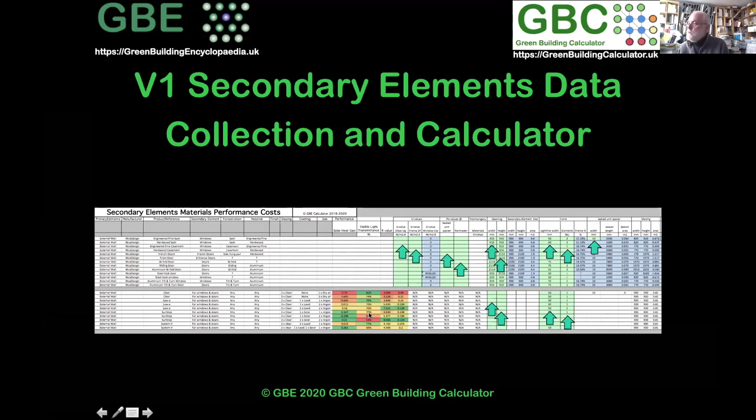I've got a secondary element calculator so that we can start to work out U values of glazing, U values of frame, U values of window. So all of that's already developing. And here we've got a whole bundle of windows, doors, etc., using different materials, different glazing fenestration configurations, but also double, triple glazed units and single glazed units here with and without gas, with and without coatings. So we can then start to cherry pick various combinations of those, start to make decisions.

Brian, this is your 2-minute warning if there's anything you really want to get across in the last couple of minutes. Thank you very much. I'm going to whiz through the rest.

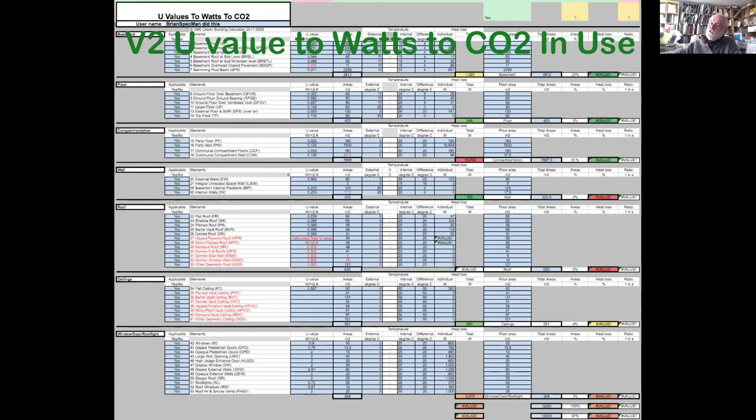So we've got elemental summaries for all of the stuff. This is where you bring all of the energy together and work out the energy consumption of the whole building, energy consumption of the groups, so elements, windows, doors, floors, roofs, etc., subgroups, so that you can begin to see, oh, the windows are wasting so much energy. We've got to focus on them and put some more money into the windows.

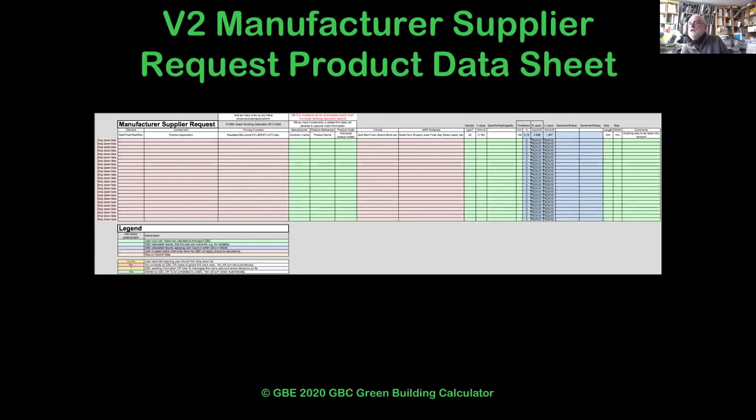We're going to look at fuel carbon factors. We've got more and more drop-down menus in order to engage with the refurbishment part, more manufacturers' data, where we're going to give them really intelligent spreadsheets so that they can populate them more readily.

And for anyone who needs any encouragement, 3 months after launch, we've got 3 awards, the Green Apple Environment Award, and we've got 2 shortlistings for the Construction Computing Awards. So those, hopefully, fingers crossed, we might do well.

But I think for the CIBSE calculation, I suspect they'll want to interrogate the thing in an awful lot more detail, and then we'll be able to work out where the nooks and crannies need sorting out. And that's me done. There's an awful lot of information out there. So yeah, please ask some questions.

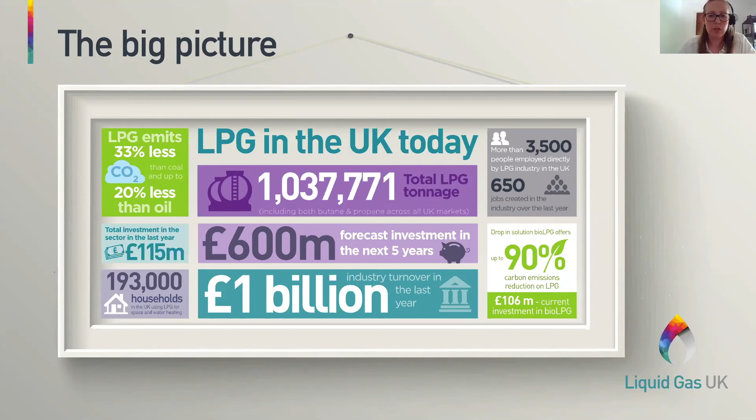So a little bit on why LPG in the first place. So LPG is the lowest carbon conventional fuel source that you can use off the gas grid. When you compare with the likes of oil and coal, you're looking at up to 20% less carbon emissions than oil, 33% less than coal. Clean burning, it has the inherent benefits that a clean gas brings. Very low NOx, SOx, very low levels of particulate matter. It's why we're seeing increasing use of LPG in taxi retrofit, for example, in city centres and in urban areas that are looking to improve air quality, because you get that immediate benefit, complementing electrified solutions.

It's versatile, and I think LPG is probably one of the most versatile energy sources in the world. You know, it's used for anything from actually powering a rocket at the moment through to the Olympic torch to all the other uses across a vast range of sectors and industries. It's used across the UK. We have members spanning, you know, UK focus and some that are just involved in each of the devolved nations.

But perhaps one of the most exciting things around our transition to bio-LPG and the role for LPG today is that all the infrastructure that you currently have with LPG, or you might look to install with LPG, is ready for the future because it can take bio-LPG at 100% blend. So some of the limitations you may have potentially seen with use of biofuels, where, for example, with bio-oil or a bio-kerosene, you're likely to have to change your infrastructure, change your tank after a 30% blend because it will corrode it. You don't get that with bio-LPG.

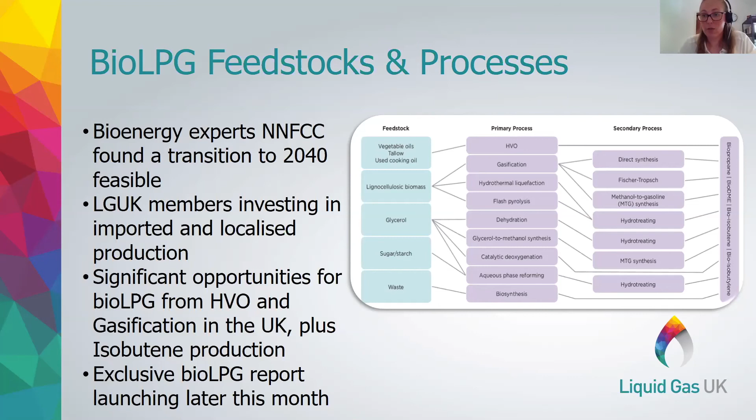So off-grid homes, really, when we're talking about decarbonising off-grid homes, we're talking about the 2 million rural off-grid homes for our market, and the majority of those use heating oil, and around 200,000 use coal. But heating oil is generally the one that we're talking about when we're looking to tackle decarbonisation of these areas.

We need to have different solutions for different types of buildings. You can't have a one-size-fits-all approach or model, but you can take lessons and overarching themes when you're looking at decarbonising these types of buildings. We had some research done last year that showed taking a mixed approach to off-grid homes, so this is a mix of heat pumps, a mix of LPG, bio-LPG and biomass in certain instances as well, could save the UK over £7 billion in levelised cost analysis in the run up to 2050 and still meet the net zero targets that we need to meet.

So, it's not just about consumer preference and being able to choose what solution works for your home. There's also a financial argument that you're going to save a lot more money in off-grid areas by taking this approach. So what we need to see is a long-term policy framework that enables consumers to make these choices from a mix of low carbon solutions, and ultimately make sustainable choices that work for them.

What we don't want to see is potentially policy coming out that could have a lot of backlash. A lot of rural MPs potentially get some very unhappy constituents complaining about this, and then you end up back at square one and we don't make any progress in the interim in off-grid areas, and that's something that we don't want to see. So I think that's incredibly important. And I'm probably preaching to the converted really, but I don't think policymakers necessarily fully understand why you can't take a one-size-fits-all approach.